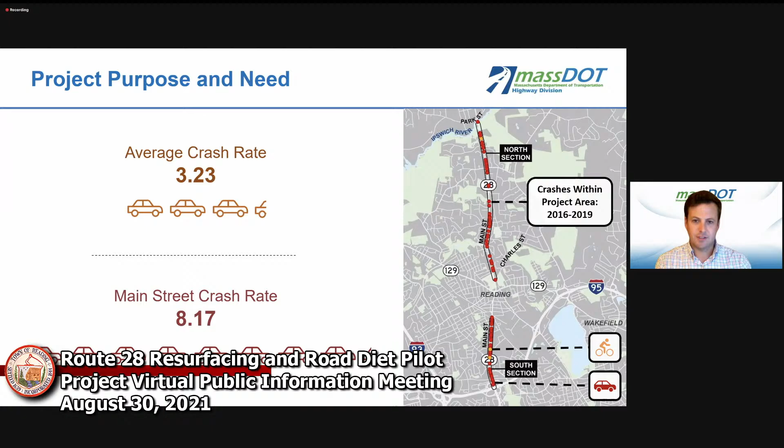The average crash rate we saw there was more than double what we see on similar facilities throughout the Commonwealth of Massachusetts — a four-lane undivided roadway with a similar type of volume and facility type. But really the main goal of the project was state of good repair. A resurfacing project was identified through our ongoing asset management system and was really the impetus for doing the resurfacing, but then also for improving safety for people using this corridor.

Calming traffic is a goal of ours on other projects, not just this Route 28 project. And then improving accessibility for pedestrians, not just along Route 28, but also crossing 28, and to meet MassDOT's Complete Streets Healthy Transportation Policy.

As part of the ongoing project delivery process, we identified a pilot, which has been underway since the spring of 2020. Our original schedule was to wrap up in the fall of 2020, but due to the ongoing pandemic and the change in driver behavior and traffic patterns throughout the Commonwealth, it was determined to extend the pilot into spring and summer of 2021.

The two competing interests as part of this pilot are data quality and pavement service life. The longer we do the pilot, the more information we can collect, which we'll present this evening, and compare that to conditions previous to the road diet. So collecting as much data as possible, analyzing, and then gathering information from the public.

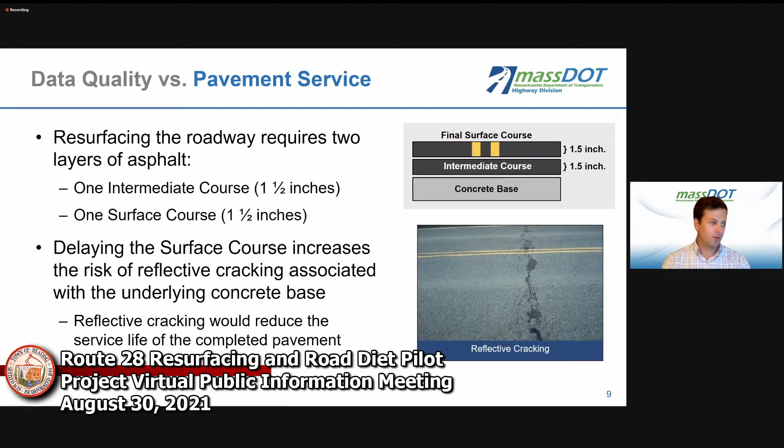Our schedule is similar to what we presented this past June, just a couple of months ago, where the South Main Street pilot evaluation was concluded in July, and in August we prepared and adjusted structures along the corridor with a final pavement course, and striping will go down this coming September.

In parallel to that, we've had several public meetings and meetings also with town staff, and this evening we'll be showing the southern section and adjustments that we're planning to make as part of the final implementation of the road diet on the southern section.

Throughout that process, we've continued to gather public input and have responded to those comments. So I'll go over quickly the evaluation, community feedback, and adjustments that we've made throughout, touch on some of the analysis of the data that we've done, and then get into the South Main Street design.

The outreach started by door-to-door flyering. Pre-COVID, that was something MassDOT was engaged in, really to the businesses on the southern section. We also had a business breakfast and info session hosted at the library.

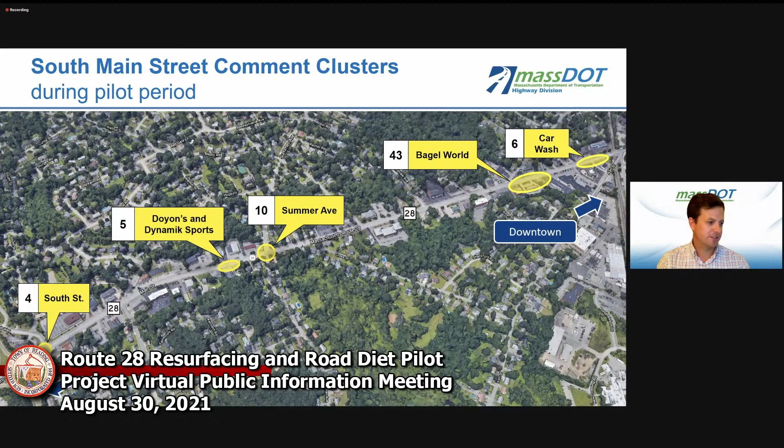We reviewed intersection crash data at South Street, added merge arrows on Route 28 in advance of Doyon's and Dynamik Sports, changed lane markings, adjusted signal timings, and revised access to and from Bagel World, as well as some of the southbound markings going into Bagel World adjacent to the car wash.

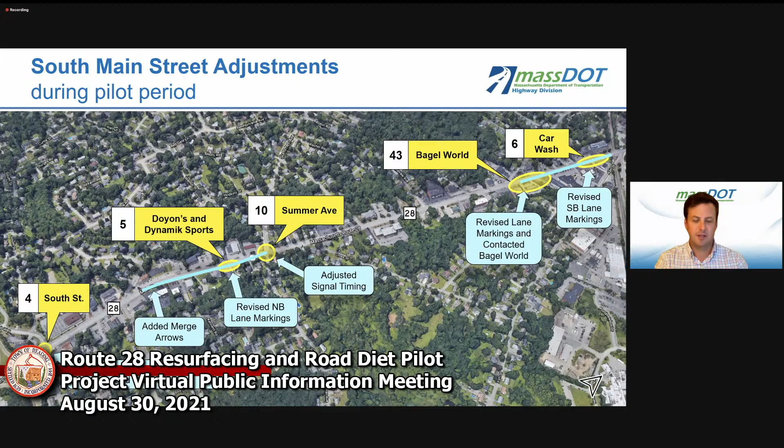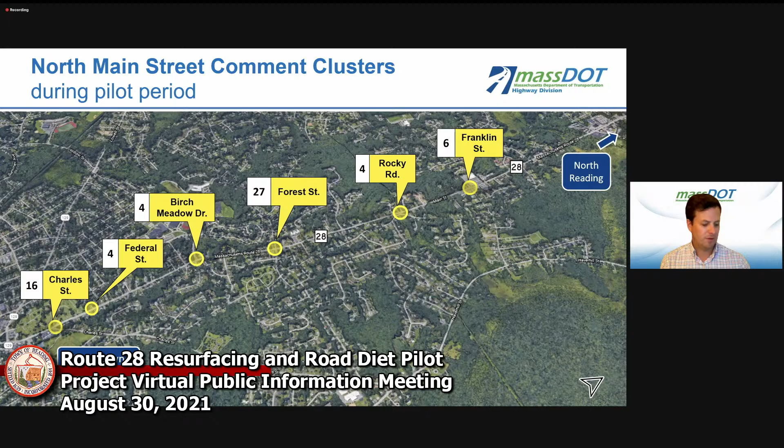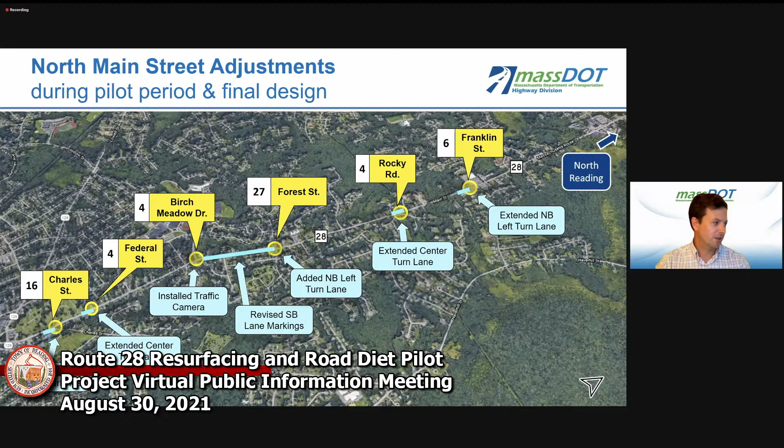We also received comments on the northern section during the pilot. Adjacent to each location you see a number reflecting the comments received: Charles Street, Federal Street, Birch Meadow, Forest, Rocky Road, Franklin Street. We revised lane markings, extended turn lanes, installed traffic cameras to get real-time information about ongoing issues we were observing, and monitored the changes we put in place. We added a northbound left turn lane at the Forest Street intersection, extended the center turn lane at Rocky Road, and extended the northbound left at Franklin Street.

One theme that emerged was a need for education on how to use center turn lanes, something new to the town of Reading but something MassDOT was familiar with as an implementation tool. So we posted a two-pager on our website with how-tos and educational information about using left turn lanes.

Design adjustments we made based on feedback reduced the number of transitions people had to make during their travels along Route 28. With the new markings in place after the revisions, less feedback was received as people got used to the new markings. That information was distributed via our social media as well as the town's social media, and posted to our website on mass.gov.

Some reminders on how to use center turn lanes: they're not used for travel. Never use the center turn lane as an ordinary traffic lane or for passing other vehicles. Center turn lanes should only be used when making a left turn or a U-turn from the roadway when permitted, or making a left turn from a side street or driveway onto Route 28.

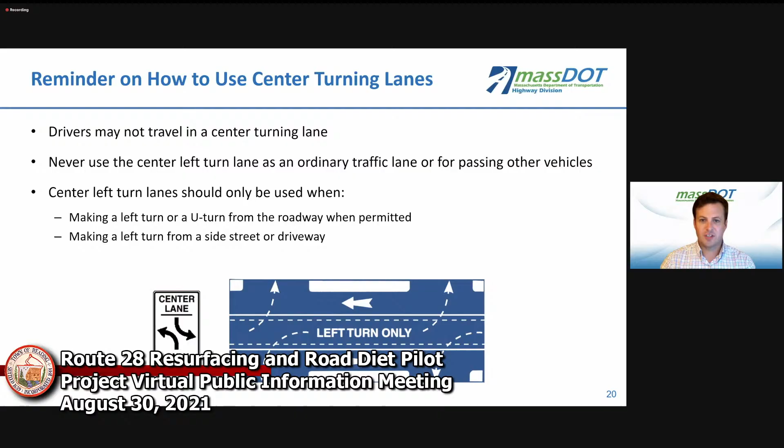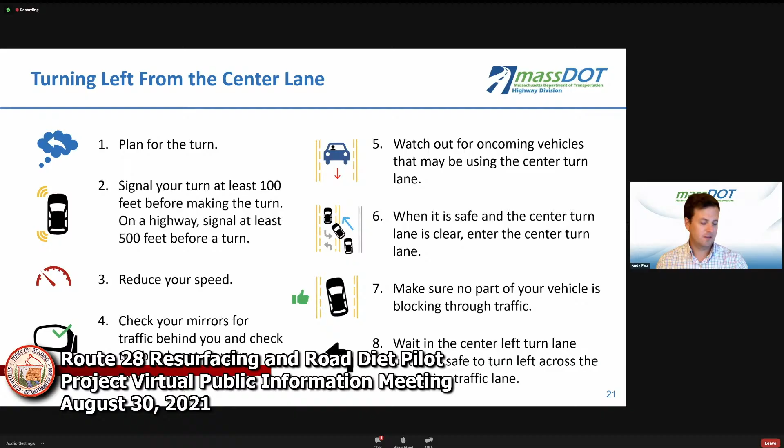Planning for your turn is summarized in our informational packet: signal your turn at least 100 feet in advance, reduce your speed, check your mirrors to make sure no one is in your blind spot before turning into the center turn lane, and watch for oncoming vehicles in that lane. When it's safe to use the center turn lane, enter it, make sure no part of the vehicle is in the adjacent lane, and then wait until there's a gap in oncoming traffic to make your turn.

Now I'll transition into the data analysis we did. The pilot evaluation looked at observations that MassDOT staff, as well as other contract staff and town staff, made while driving the corridor. We also looked at community feedback, and all of that fed into several metrics in the data analysis, including vehicle speeds, travel times, traffic volumes, and driver and pedestrian expectations.

I'll run through some of the data analysis we conducted. The average daily volumes on Main Street, comparing 2019 to 2021, showed a significant drop-off in April of 2020 at the onset of the pandemic. Over the course of 2020, volumes bounced back to about 80% of what they were in 2019. We continue to see similar trends in 2021 compared to 2020 and 2019, where that roughly 80% threshold is used.

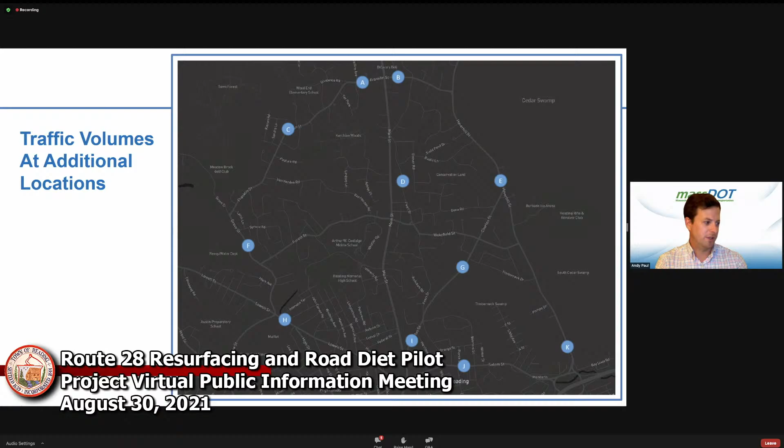You can see here, based off of all of the data points that we observed, very similar trends. About 80% of the volume is observed on those side streets when compared to pre-pandemic levels. This is again summarizing an entire year's worth of data from 2019 to 2020.

Back up a couple of slides. So the 20% change that we saw over the course of 2019 to 2020 is very similar to the changes that we saw come year end of 2020 - again, a 20% reduction in traffic volumes. So we knew the volumes were lower, but we wanted to look at other metrics.

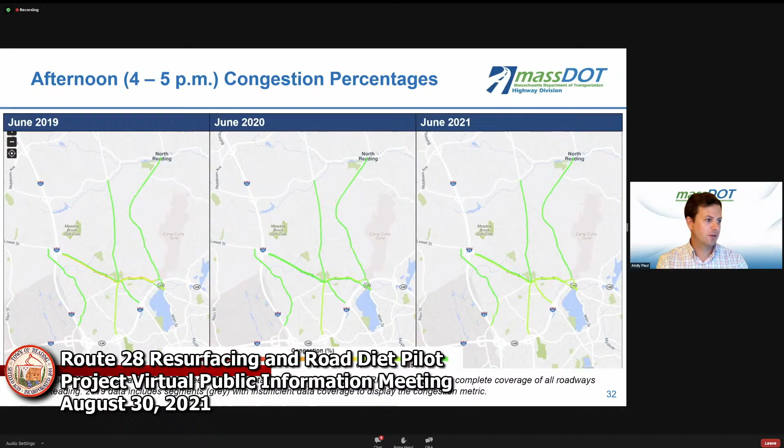The key findings were that traffic volumes have stabilized around 80% of what they were before the COVID-19 pandemic, and average speeds on Main Street have stayed relatively consistent, while other roadways in the region have seen an increase in speed during lower volumes. Average and peak travel times have stayed relatively consistent along the corridor. We didn't see an increase in delay despite the reduction in lanes along the corridor.

Now to the South Main Street design. What we've noted is that based on our findings, we believe the pilot configurations have reduced vehicle speeds and improved pedestrian safety. North of Summer Street, a two-way left turn lane will be implemented, and south of Summer towards the interchange would remain as a 2-and-2 configuration, similar to what has been in place since we implemented the road diet pilot last summer, in the summer of 2020.

One of the key findings that we observed from road diets throughout the state was a reduction in speeds and a reduction in pedestrian risk when crossing the roadway. There's elimination of a double threat, which occurs when two vehicles traveling in the same direction on a 4-lane road - one stops, lets a pedestrian cross the street, and that vehicle blocks the sight line of the pedestrian as well as the driver to the pedestrian. That double threat is eliminated when a road diet is put in place.

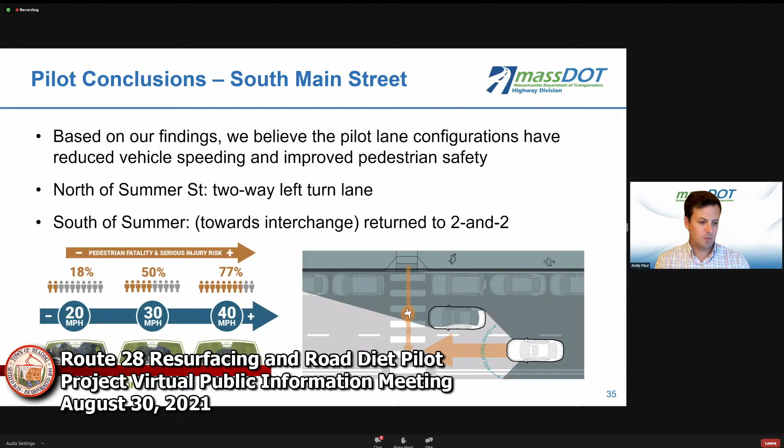So I'll step through the implementation from the interchange of I-95 and Route 28 and walk you through - from left to right is north on the plan set displayed on the screen. From the interchange through the Hopkins Street intersection will remain as 4 lanes as it was before the road diet pilot, as well as it is today during the pilot.

That will extend all the way up to and about the Summer Ave intersection. There will be minor modifications at the Summer Ave intersection, where today the left lane northbound is reduced from 2 lanes to 1 lane, and then a left turn only lane is developed.

This will be modified slightly to have dashed lines, signs, and pavement markings indicating that the left lane is for left turn only. This is based on feedback received at the previous public meeting in June.

At and north of the Hopkins intersection, there's a curve both horizontally along the roadway, turning to the right if you're going northbound, as well as a hill, with the crest where the curve is indicated on this plan. That made it challenging for some drivers to notice the lane drop arrows on the pavement.

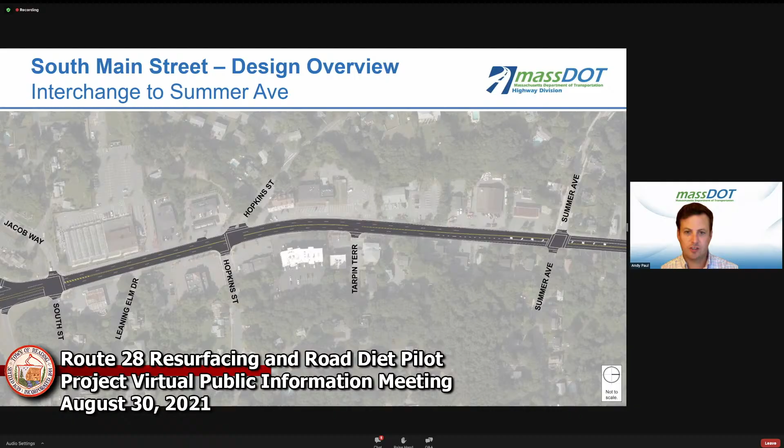It will operate very similarly at the intersection, similar to how it has operated over the course of the last year plus while the pilot has been in place. No lane configuration changes are proposed at this location.

Continuing north of Summer Ave towards Minot Street, the pilot configuration, the 3-lane configuration, will remain in place after final implementation. It's a very standard application of a 3-lane cross-section with a center turn lane for access to and from the side streets, as well as residents and businesses along the corridor.

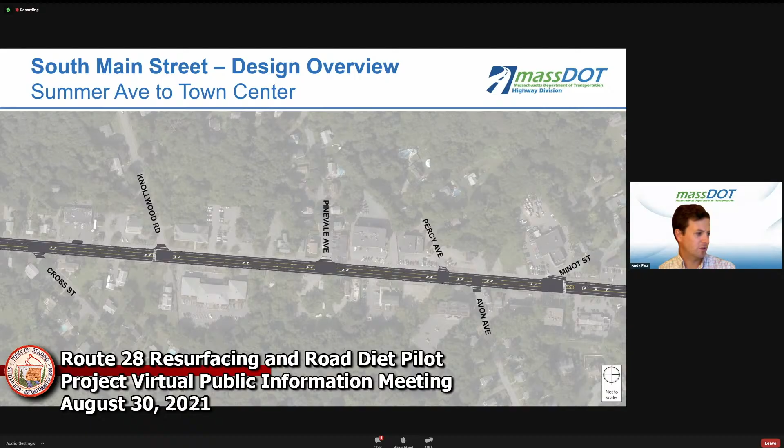North of Minot Street will also remain very similar to, will remain the same as it does today as part of the pilot. There'll be a left turn lane only into Bagel World, as noted here on the plan, just right of Minot Street. North of there, we'll transition back to 4 lanes at the railroad tracks.

For next steps, recapping our schedule: we've prepared and adjusted the structures over the course of this month, August 2021, and in the next 2 weeks we'll start with paving and line striping work.

We'll continue to monitor and gather public input, and we'll have new contact information where feedback can be given to MassDOT. We'll give construction updates, and project completion will go out through our press office, the MassDOT press office. We'll continue to coordinate with town staff on any feedback we get, both from this call this evening and through other means.

We'll continue to evaluate safety, speed, and crash data over the life cycle of the pavement. In most cases, pavement similar to what we're installing here on Route 28 lasts anywhere between 10 and 20 years. Over that course, we will monitor changes or any feedback we get from the public, similar to the way we would on any of our other facilities.

District 4 Highway Director Paul Stedman is on the call. He receives information from cities and towns all over the district, and I work closely with Paul's counterparts throughout the state on state roadways, addressing any issues related to safety, speed, and crashes. We'll have ongoing communication and routine meetings with town staff, both for this project and others along the corridor. I'll now transition it to Paul Stedman, our District 4 Highway Director.

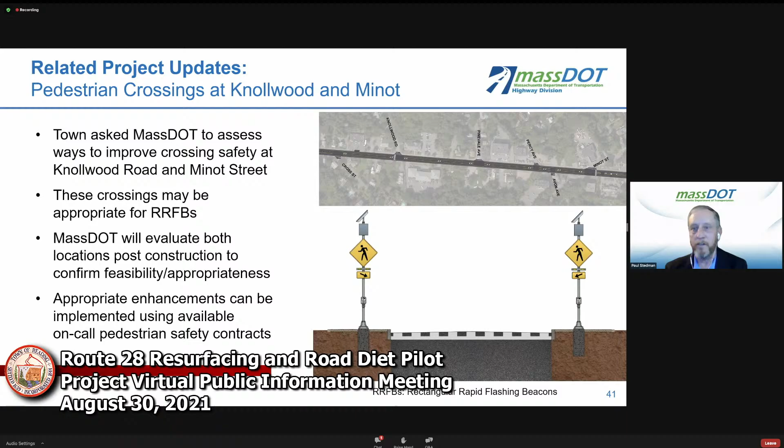And these units, as they've grown from a technology standpoint, can now be introduced in a solar fashion, so very little undergrounding that would disturb any of the work being done as part of the project. Next slide, please, Andy.

I just wanted to touch upon the other project that is about to start in this area of Route 28 in Reading. That's the Hopkins Street intersection reconstruction. It will add a new traffic signal at the intersection, along with rebuilding the intersection and adding signalized crosswalks. It will also feature new and upgraded traffic signal equipment at the Summer Street intersection.

So one of the things we're doing right now is coordinating those two projects. The Hopkins Street project was in the design phase while the road diet pilot was underway. With the decision to maintain the road diet pilot markings in the area of Summer Street, our design consultant for the Hopkins Street project is going back and doing some minor modifications to the design detailing. So what we expect to see on that project for the remainder of this construction season is primarily utility relocation work, and then the full construction operations will start in the spring of 2022.

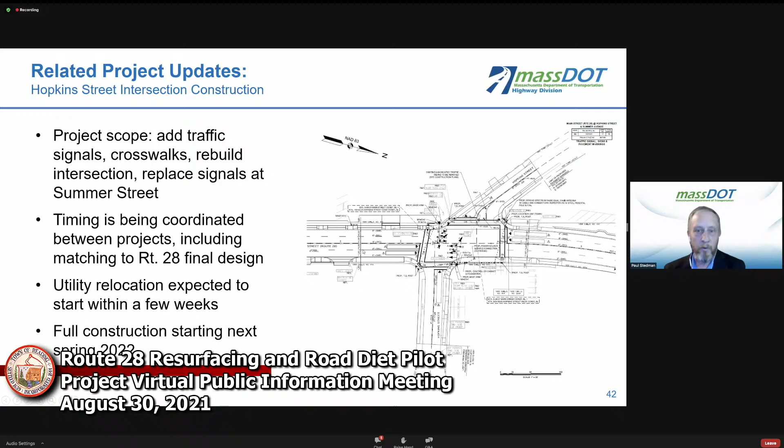Just a real quick update: during our evaluation period, when we were gearing up to do the final paving in the northern section, we had been contacted by National Grid about some issues with a section of their gas line in the town center, Route 129 towards Birch Meadow Road. It was a rather large section, but through further reconnaissance using cameras, National Grid was able to isolate where the water intrusion was getting into the line and creating service, reliability, and safety issues. So we worked with them to implement some limited spot repairs ahead of our paving in the north section. We believe, and National Grid believes, that they've addressed the issue and that no further work would be required in the immediate future.

However, if that were not to be the case, and National Grid needed to do more elaborate or extensive work impacting the pavement structure just put down, they would be required to obtain an access permit from MassDOT. Instead of a trench type of repair, we would hold them to a higher degree of restoration of the pavement, putting in not only a permanent pavement structure but also coming back to mill and resurface an appropriate segment of the roadway, restoring the final wearing surface along with any disturbed pavement markings or sidewalk areas, so that the investment we've made in this corridor will not be impacted to any significant degree.

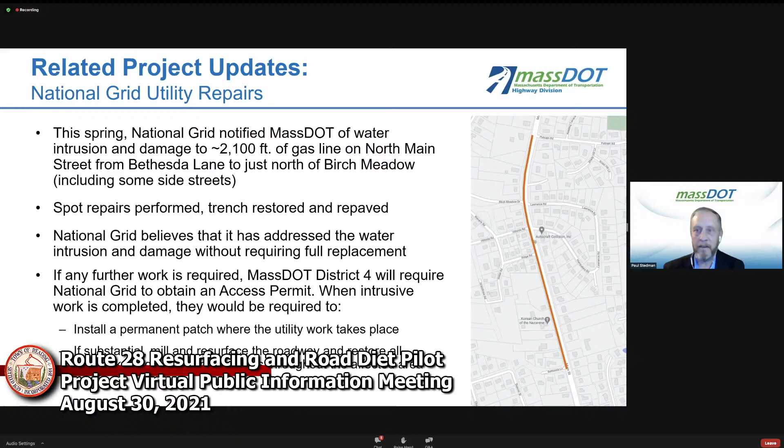So with that, Jeff, I'll turn it back over to you.